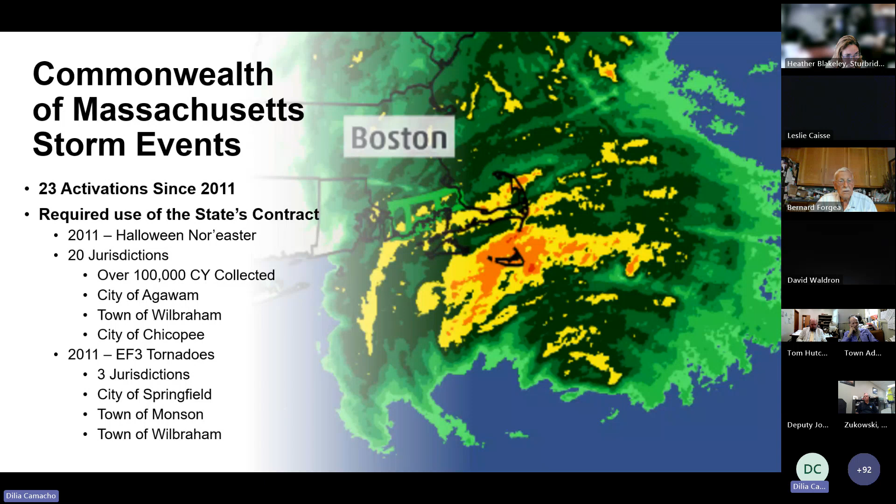I'm sure everybody remembers that. We collected over 100,000 cubic yards of debris within the city of Agawam, the town of Wilbraham, and the city of Chicopee. In addition, in 2011, we also saw some EF3 tornadoes impact the state, mostly in 3 jurisdictions, which included the city of Springfield, the town of Monson, and the town of Wilbraham.

The Commonwealth of Massachusetts Disaster Debris Management Service contract was recently re-procured in 2021, and it extends through November of 2032. It is one of the most comprehensive state contracts designed to handle large-scale and standard storm events, and it offers an extra layer of protection during emergency events.

This is great because it allows for pre-planning and preparation to expedite the recovery efforts to restore normalcy, and it's also available to all municipalities within the Commonwealth.

Some of the scopes and services offered under the contract include emergency road clearance service, temporary debris management sites and aggregation site management and operations, right-of-way collection, processing, disposal of uncontaminated vegetative debris, C&D, electronic waste, household hazardous waste, white goods, and also the removal, processing, and disposal of hazardous limbs, trees, and stumps.

So when do you use a state contract? Basically, you use a state contract when there is no pre-position contract in place, and there's a need for a procurement avenue in the event of emergencies. Also, you use a contract when local response and resources have been exhausted or overwhelmed, additional support is required, and resources to manage that debris removal.

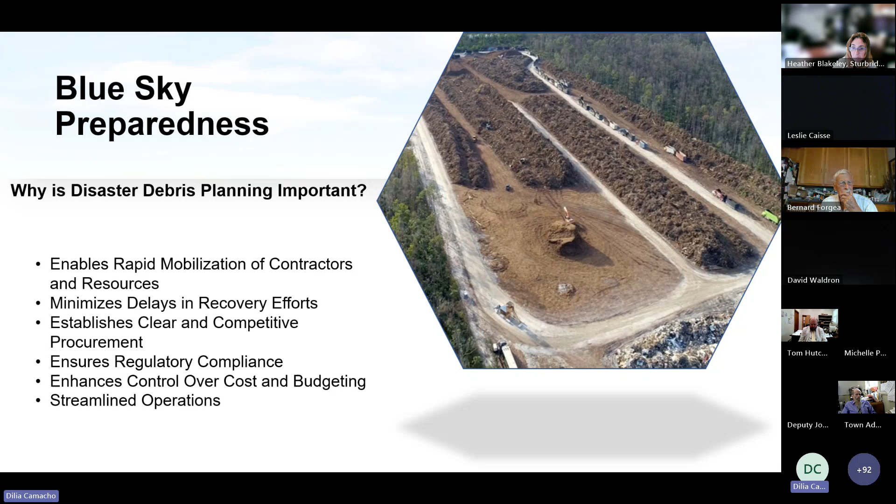And lastly, disaster debris planning enables rapid mobilization of contractors and resources to minimize delays in recovery efforts, ensuring regulatory compliance, and it streamlines your operations.

Also very important, if you do plan on utilizing the state contract, review the state contract and the services offered under that contract pre-event. Identify those scopes of services that might be required and performed using federal grant funds for Category A and Category B.

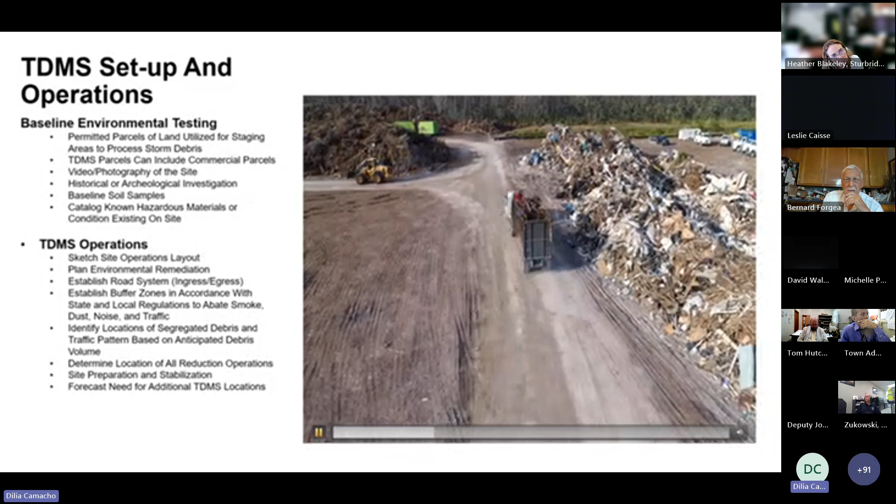Okay, great. So basically, this temporary debris management site was used in Collier County, Florida for Hurricane Irma. TDMS setup included the clearing of 40 acres. We had approximately 5,500 feet of road construction for stability.

Hurricane Irma was a windstorm and generated more vegetative debris than C&D. As you can see here, we have the excavators working to keep the debris away from the roadway to allow the trucks to make full passage through and offload their debris.

Now, Hurricane Irma generated about 3.6 million cubic yards of debris, and this 40-acre parcel provided enough room to store and process a portion of the storm debris. In total, we had about probably 6 temporary debris management sites and 4 residential drop-off sites.

Now, taking into consideration this is a massive site, and I know that in Massachusetts space is very limited, this would be the ideal parcel for a temporary debris management site.

And as you can see, we have the separation of debris. We have the C&D at the far end, you have your veg in the middle, you have your grinding activities, and then over here at the corner, this is the ingress where you have the tower monitor up here.

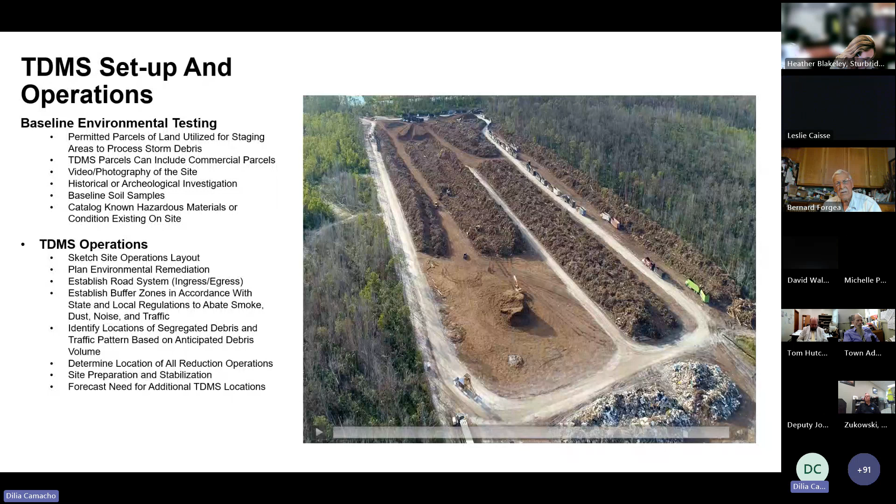And then you have your exit monitor at the bottom here to ensure that when the trucks come through, those trucks are empty and they'll go back out and do more collections.

So we are going to go into right-of-way collections, and I'm going to go ahead and play a short video as well. It may be a little noisy, so just bear with me.

All right, so here we can see the claw truck collecting the debris on the right-of-way. You see the field supervisor assisting with sweeping up the debris for collections.

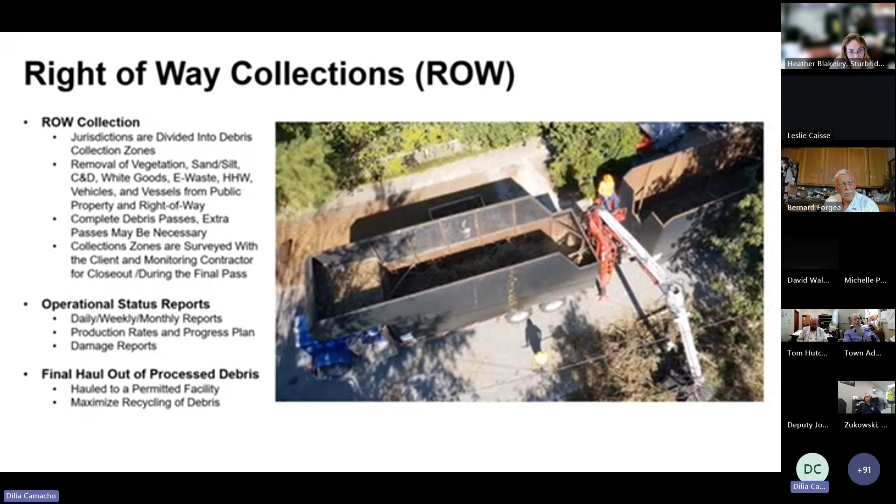Now, if you notice, although it looks close, the claw truck is far away enough from those power lines not to cause any damage to that power line.

Depending on the storm's impact, multiple right-of-way collection passes may be required. Standard is probably about 2 to 3.

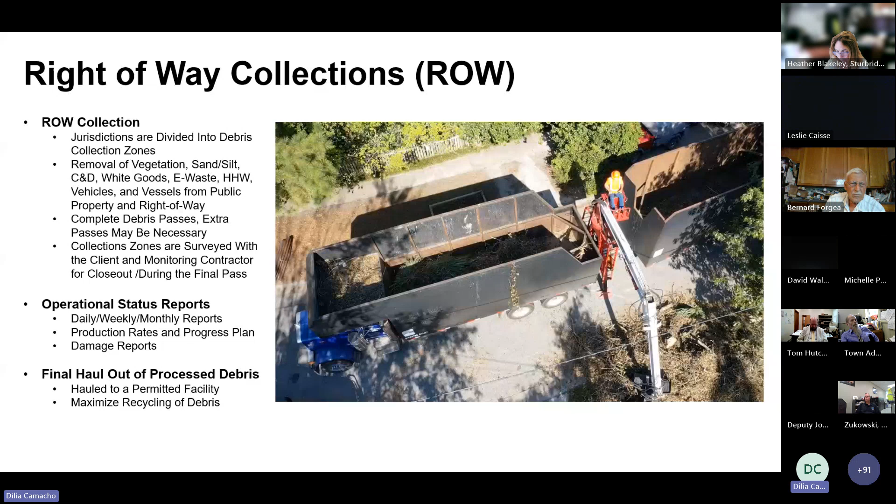The debris monitor, you're going to see in a minute, is on site. He's reporting the location and collection debris through their ADMS system. Now, the information captured allows for the generation of your operational status report.

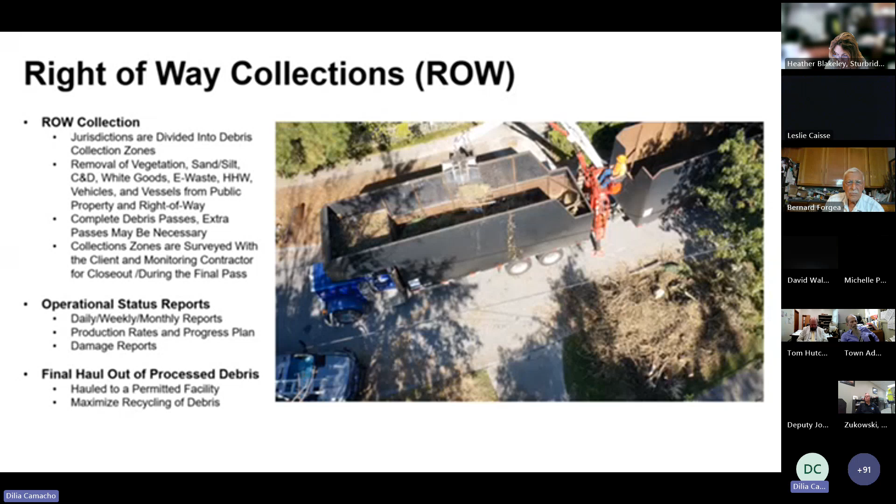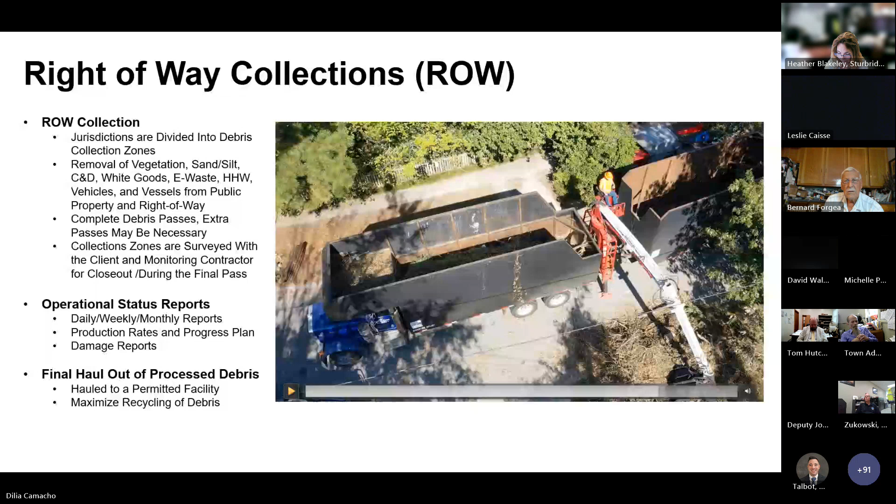Now, once the debris is processed at the temporary... Dilia, I'm sorry, we're losing your audio. I knew it was a little bit noisy.

So anyway, once at the temporary debris management site, the material is hauled there, then to the permanent facility once everything is processed.

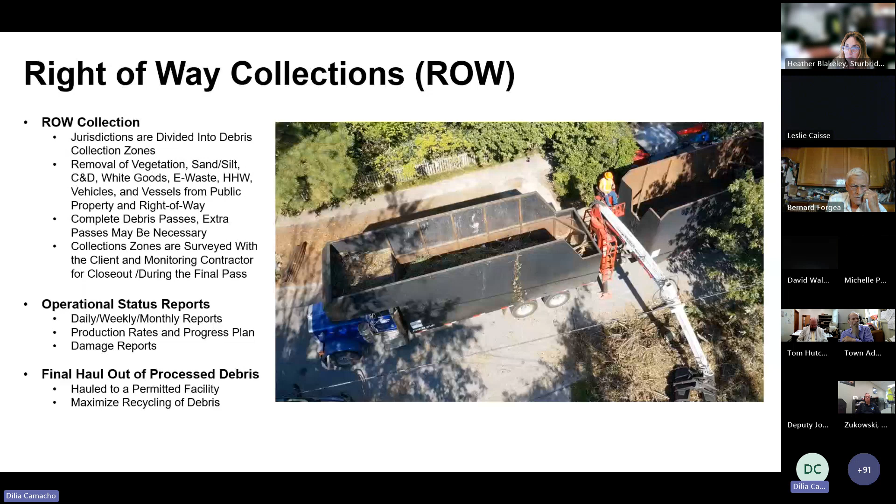And it's important to note that every effort is made to maximize the recycling and the beneficial use of that storm debris, keeping in mind that landfill airspace is limited, and debris generated from these storms can really have a high impact on these landfills and the life expectancy of that landfill and facility.

So once the debris haul out is complete, the temporary debris management site undergoes a complete environmental baseline evaluation to restore the site to its pre-existing condition. The execution and final release is provided by the municipality, and the site then becomes officially closed.

Joint surveys are completed to complete the mission's reconciliation, which includes a punch list of the debris collections, making sure that all of the piles have been picked up on the right of way, and also that any hot spots have also been cleared out.

And so for final reconciliation, we work closely with the monitoring contractors to validate documents and project work by leveraging our database to expedite closeout and provide reimbursement support. We also assist clients with audits and document requests for years after the project is completed.

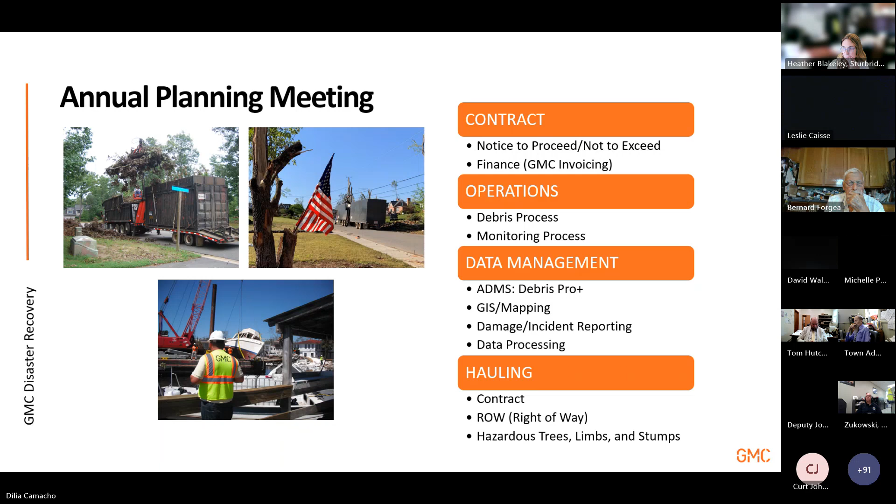This will take us into the operations phase as we move into phase 2, which is the mobilization phase.

Once that notice to proceed and the not-to-exceed is issued, our project management team will deploy along with any available trained field personnel, as well as one of our rapid response packages. These are enclosed trailers that we store and maintain around the country, containing everything we need to stand up a project - from electronics to paperwork, PPE, office supplies, water, field supplies, generators, and health and safety equipment. If this is in response to an anticipated event, we would more than likely shelter in place prior to that notice to proceed or not-to-exceed being issued.

Myself, as well as Ashford, I believe Rob and Dilia were both there. We did this for Hurricane Henri a few years back, and we were actually in MEMA's EOC prior to the storm's arrival. There's a huge benefit to that, because it allows a more rapid response to operations. Our goal is to begin operations as soon as possible. That's obviously going to be dependent on the type and severity of the event, as well as the available resources.

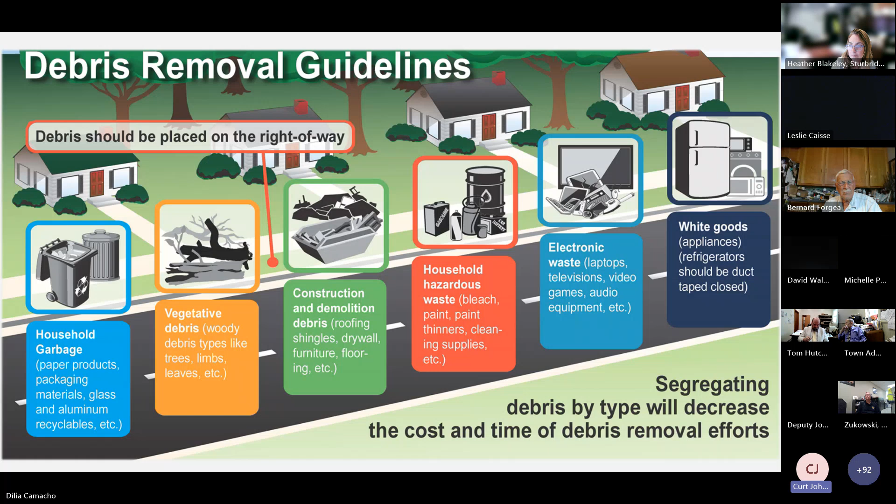So the next slide shows just an example. This is something that we recommend all of our clients get out to their citizens, if not pre-event, at least immediately after an event. As was mentioned, making sure that debris is placed on the right-of-way properly and properly segregated speeds up the project timeline tremendously. This is beneficial to everybody to ensure that your residents know the expectation of how their debris should be placed and segregated.

Each truck that's picking up debris will have a monitor with them. That process begins when the truck begins picking up the debris. The monitor will initiate the ticket when the truck arrives, and then the monitor ensures that they're only picking up eligible debris. Once the truck is full, the field monitor will complete the ticket. They will then write that information to the NFC tag, which each truck has on its own placard, with its own truck number and its own individual NFC tag.

That truck then leaves, goes to the DMS. Once the truck arrives at the DMS, the tower monitor will scan that NFC tag to retrieve the load ticket data. The tower monitor goes up, they make a load call from the tower. The driver then offloads the debris while the tower monitor is completing that ticket. Once the truck is empty, as Dilia mentioned, that truck will come back to the tower so that the tower monitor can ensure that they're empty.

For hazardous limbs, the current eligibility requirements according to the PAPPG V4: the limbs must be 2 inches or larger in diameter, measured at the point of the break. The limb or branch must extend over the public right-of-way. It must pose an immediate threat, and the contractor would remove the hazard from the right-of-way without entering onto private property. Only the minimum cuts necessary to remove the hazard are eligible, making sure that you're not going in and cutting out half a tree to remove one limb. That's the current eligibility criteria for hazardous limbs.

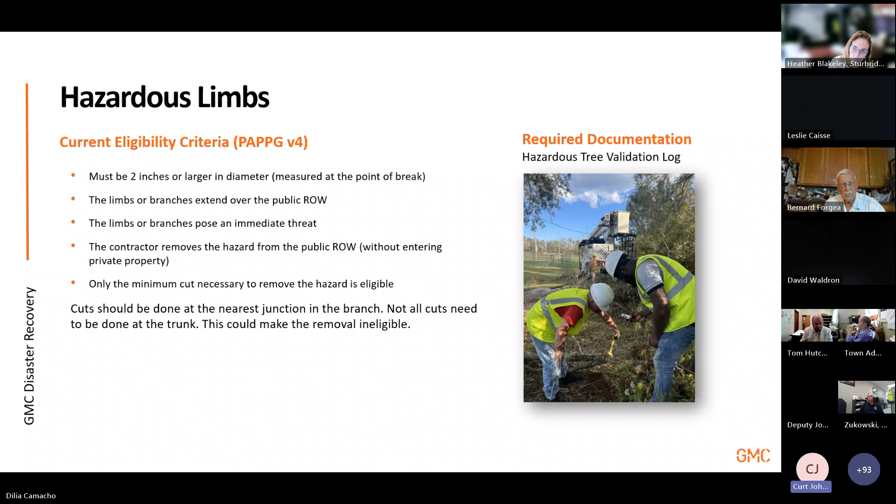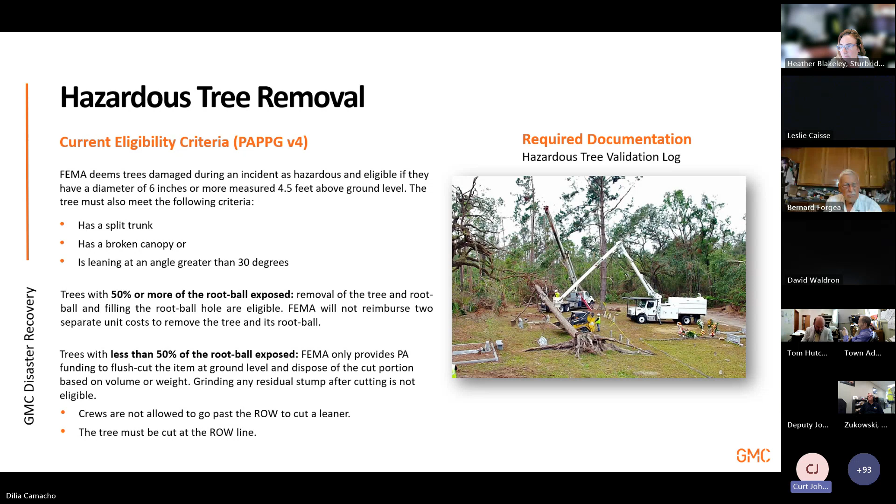For hazardous trees, the current eligibility according to the PAPPG V4: the tree must be 6 inches or more, measured 4.5 feet or breast high above the ground. It must also have either a split trunk, a broken canopy, and/or be leaning at an angle greater than 30 degrees. Trees with 50% or more of the root ball exposed - not only the tree but the root ball - are also eligible for removal, and that's a one ticket cost, all inclusive. They won't reimburse for two separate costs of removal of the tree and removal of the stump. If the tree has less than 50% of the root ball exposed, FEMA will only pay for that tree to be flush cut at the ground level, and then disposal of the cut portion based on volume or weight. Grinding the residual stump after cutting is not eligible. Crews are not allowed to go past the right-of-way to cut a leaner, and the tree must be cut at the right-of-way line.

For hazardous stumps, the current eligibility according to V4: stumps with 50% or more of the root ball exposed, removal of the stump and filling of the root ball hole is eligible. If grinding in place is more cost effective than extraction, grinding is also eligible. Stumps smaller than 2 feet in diameter, or those not requiring extraction, FEMA will provide funding based on volume or weight only. The additional requirements for stumps: they must be 2 feet or larger in diameter, measured 2 feet above the ground. Extraction is mandatory for removal eligibility. The eligible cost includes extraction, transport, disposal, and filling of the root ball hole - that is an all-inclusive cost there.

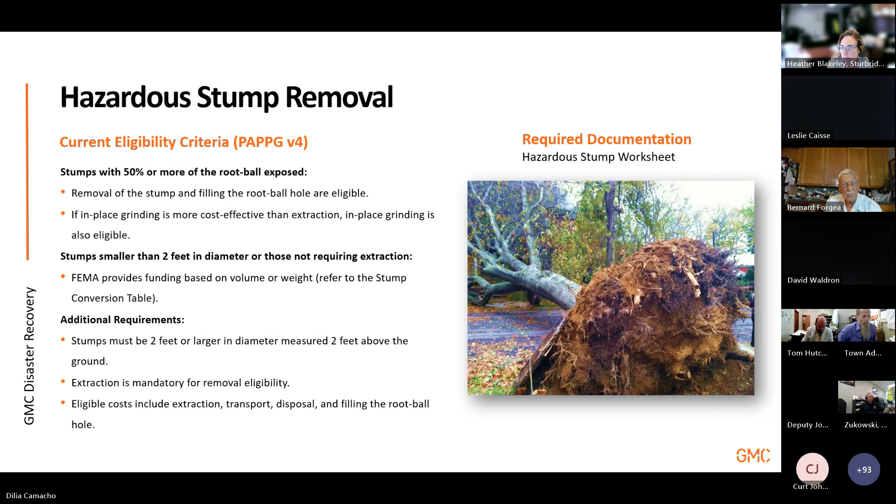So what's changing with the PAPPG V5, which is out for review right now. I believe we still have at least another week for review. We provided the links for that in the link library earlier in the presentation, so you'll actually be able to go in and see what the V5 looks like. I also included a link with a summary of all the proposed changes for the V5. I'd encourage you to take a look at those if you have time, especially before that question period ends in about a week.

Next slide. These are the upcoming criteria changes for hazardous limbs. Per the V5, the limb or branch must extend over the public right-of-way, which hasn't changed. The limb or branch must pose an immediate threat, and the contractor removes the hazard from the right-of-way without entering onto private property. Again, only the necessary cuts to remove the hazard are eligible.

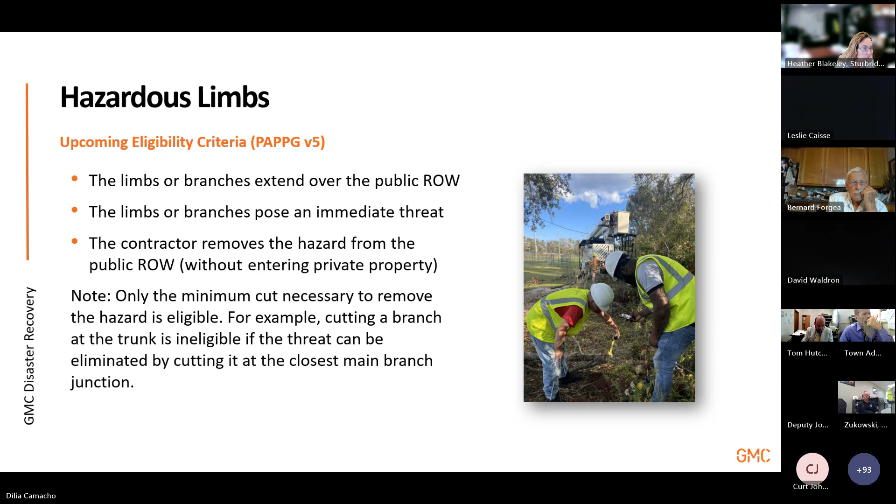Next slide. For hazardous tree, again, these are the upcoming criteria. FEMA considers incident damaged trees to be hazardous and eligible for removal if the tree presents a hazard to the public due to conditions such as, but not limited to, deterioration or physical damage to the root system, trunk, stem, or limbs, and the direction and lean of the tree per the occupational safety health standards. For trees with 50% or more of the root ball exposed, removal of the tree and root ball and filling of the root ball hole are eligible. FEMA will not reimburse two separate unit costs.

Trees with less than 50% of the root ball exposed, FEMA will only provide funding to flush cut the item at the ground and dispose of the cut portion based on volume or weight. Grinding any residual stump after the cutting is not eligible.

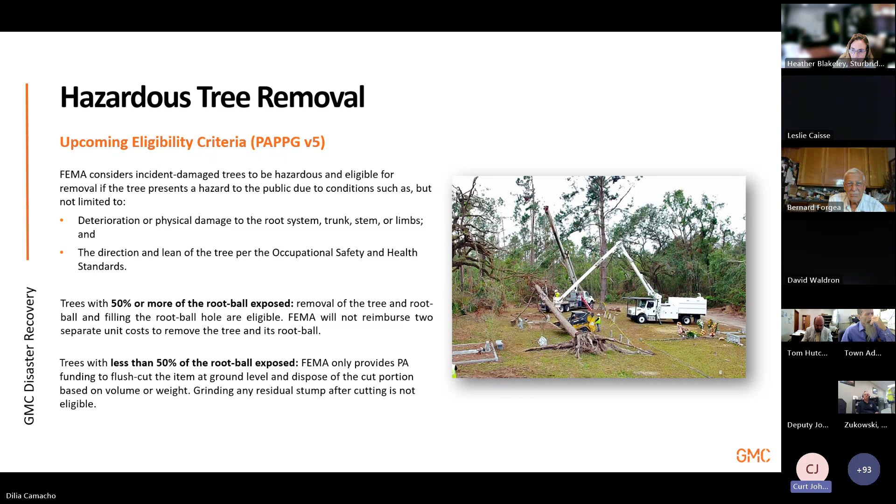So these are the major changes that, if put into effect in the V5, are concerning to not only us as a monitoring company. I can assure you we've had these conversations with all of the prime debris haulers, including AshBritt, and they all kind of feel the same, that these are some pretty major changes. But they're updating the requirements, which encourages applicants to work with qualified individuals to perform an assessment of hazardous trees to determine if they can be saved by bracing rather than removal.

They removed the condition that bracing a tree is eligible only when doing so is less costly than removal and disposal. They are removing the size requirements for limbs, trees, and stumps. So whereas now a hanger has to be 2 inches, a tree has to be 6 inches, and a stump has to be 24 inches, all those size requirements have been removed.

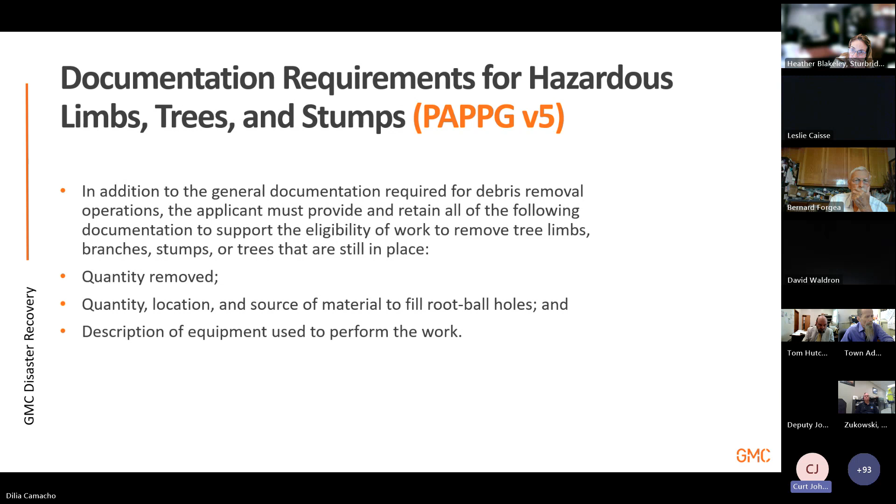And that is the end of my presentation. Again, just providing that contact number there again.